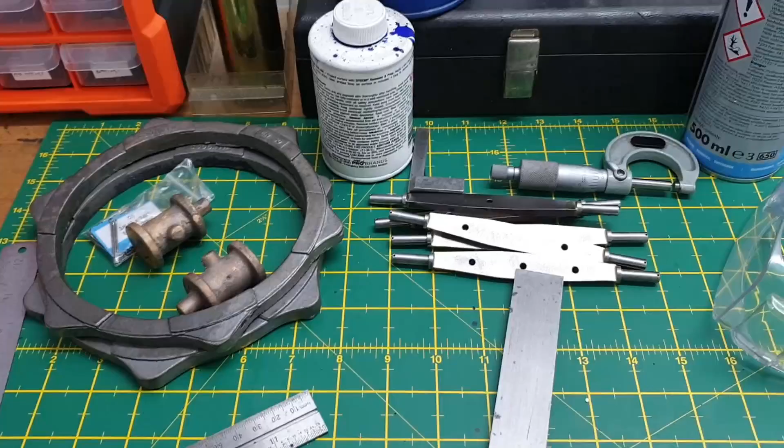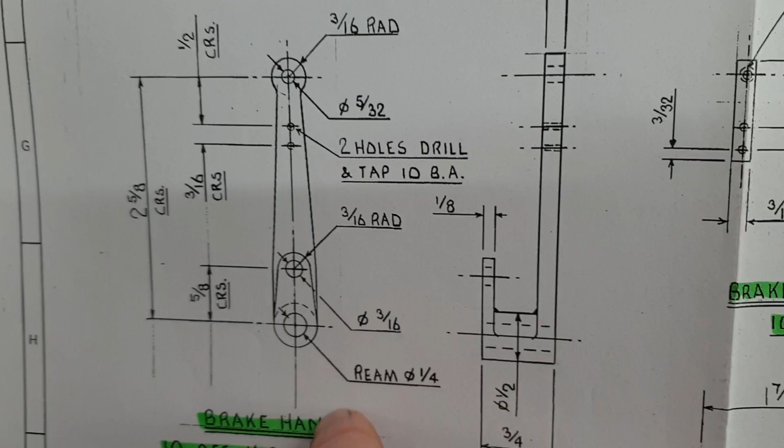Continuing with the brake system, we're now moving on to the brake hangers, which comprises a plate of 3/16 plate, an 1/8 plate, and a piece of 1/2 inch bar in between, which will be bored out and reamed 1/4 inch. So first things first is cut some steel up.

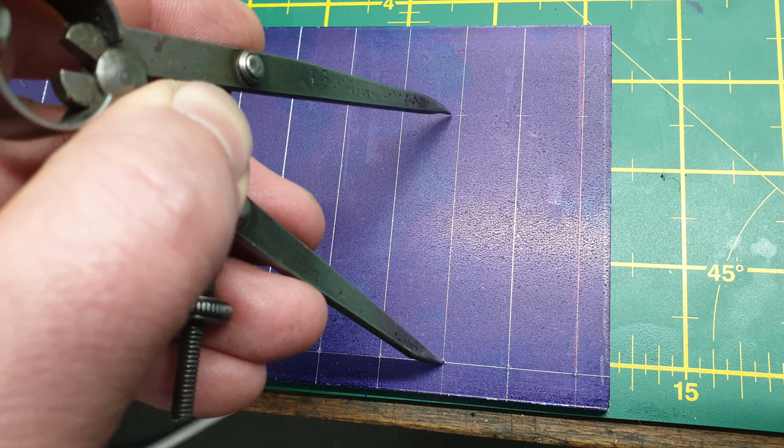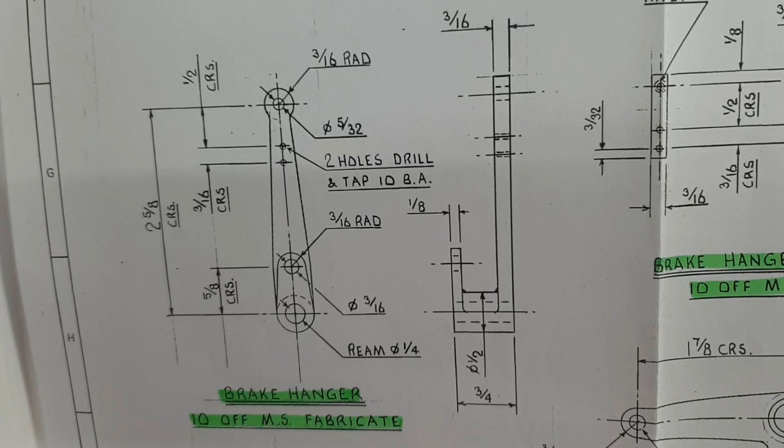Having thought about this, I think what we're going to do is, before we start cutting the plate into pieces, identify all these hole centres in the 3/16 plate, mark them off, centre punch them, drill them, tap these two 10BA holes while it's all one plate, to make it easier to handle and save messing around with bits and bobs later on. So that's what we'll do first.

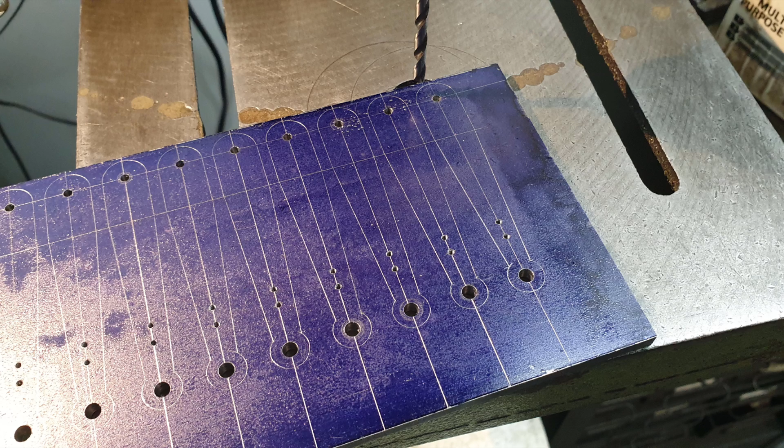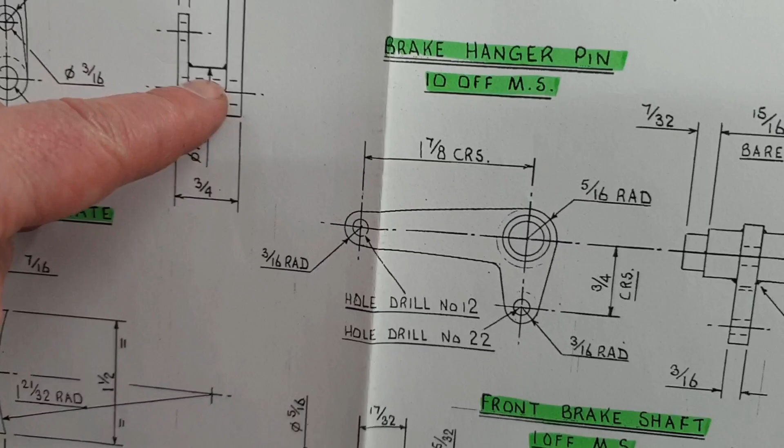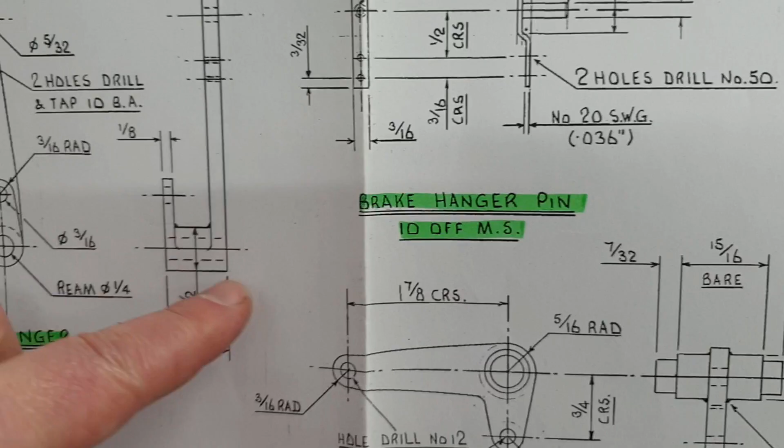Now then, I've gone on to drill this end at 5/32, same as that end. On the finished component, that hole will be a 1/4 diameter. But what I intend to do, as this is an assembly of 1/2 inch bar, a small piece of 1/8 plate, and the 3/16 plate we're just making now, is drill the bar and this end at 5/32. I can then put a piece of bar through there to hold it all in situ while it's silver soldered, and then we'll bore out to the 1/4 inch, which is the final bore. So that's the theory.

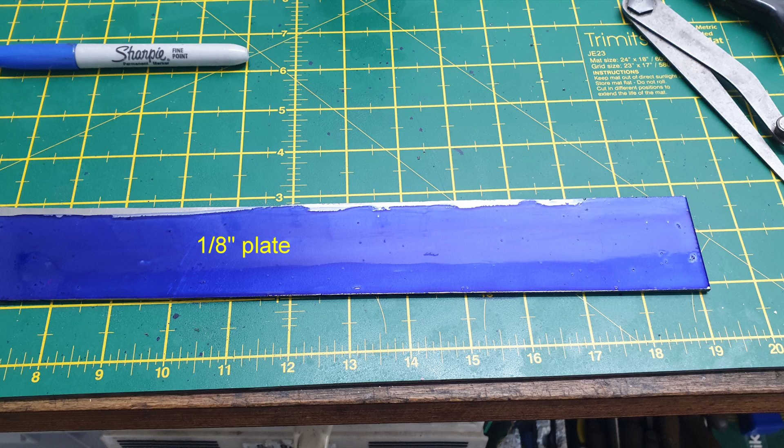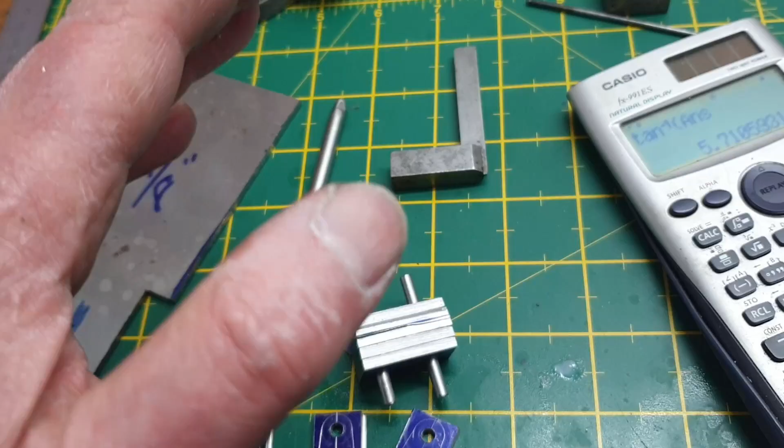Now then, I've cut out the small part of the brake hangers, and now we need to mill them to shape. Rather than do them individually, I thought I'll stick a piece of 3/16 rod through these holes and gang them up like so. We can rest them on the mill vise, with the rods resting on the tops of the vise jaws. If we cant the mill head over by about 5 3/4 degrees, or near enough 6 degrees, we should be able to just do a face cut right over the top of these blocks, and do 5 at a time in pretty quick order. So we'll give that a go.

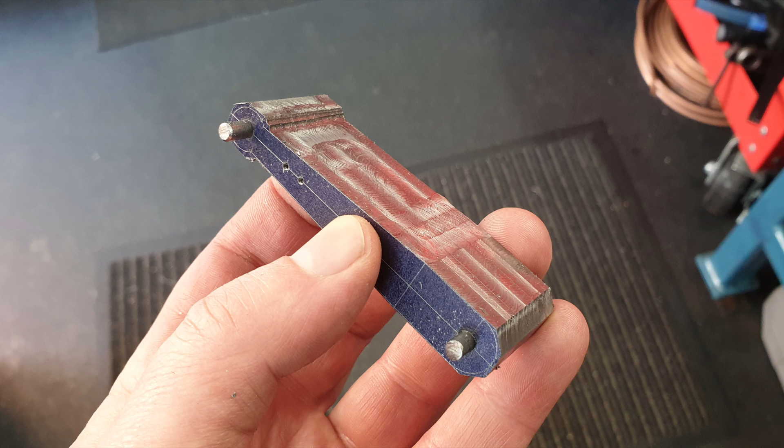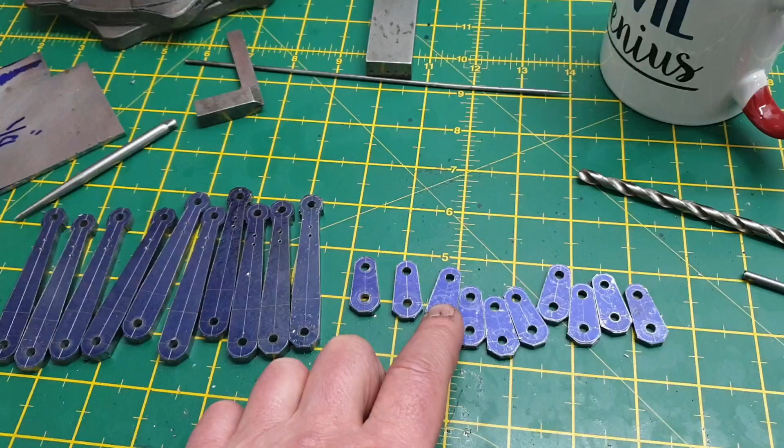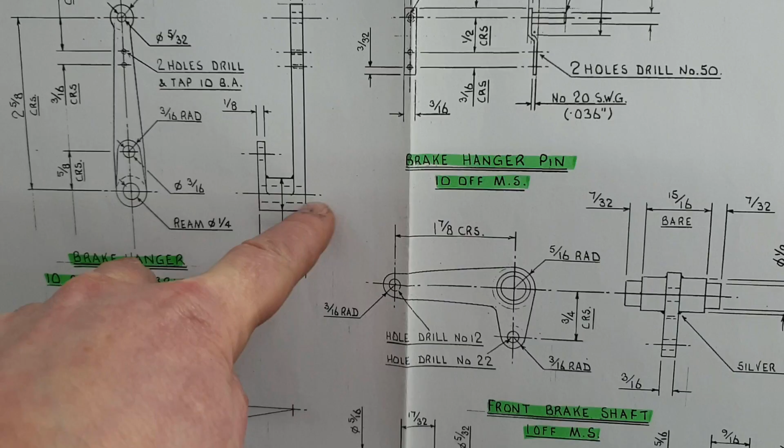Okay, we've got the 10 3/16 drop arms and the smaller 1/8 plate end of the drop arm, or brake hanger should I say. The next bit is to turn some pieces of 1/2 inch bar with a 3/16 hole through, so that we can pin the small piece, the bar and the larger piece together for silver soldering. Once they're silver soldered, we can drill through the quarter and ream a quarter, and that'll be those finished.

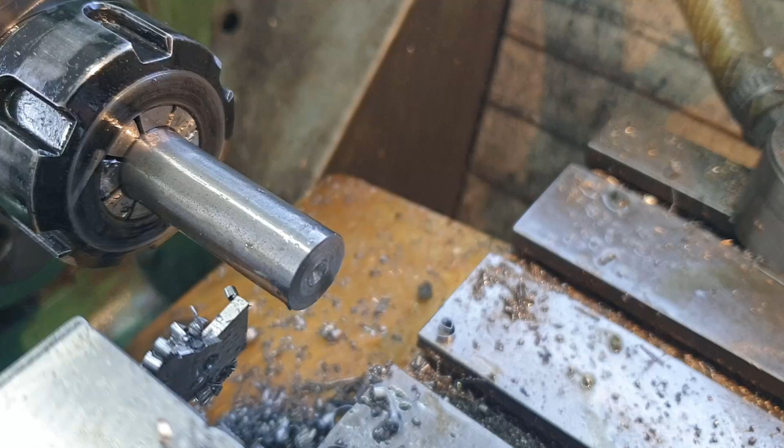Okay, now to make the spacers, what we've got is a piece of 1/2 inch mild steel bar in the lathe chuck, and we're going to drill it out to a depth of 1 1/8 inch thereabouts, and part off 2 spacers at a time. That's the plan. So we're going in first with a smaller drill, just as a pilot, and we'll be drilling to about 1 1/8 inch depth.

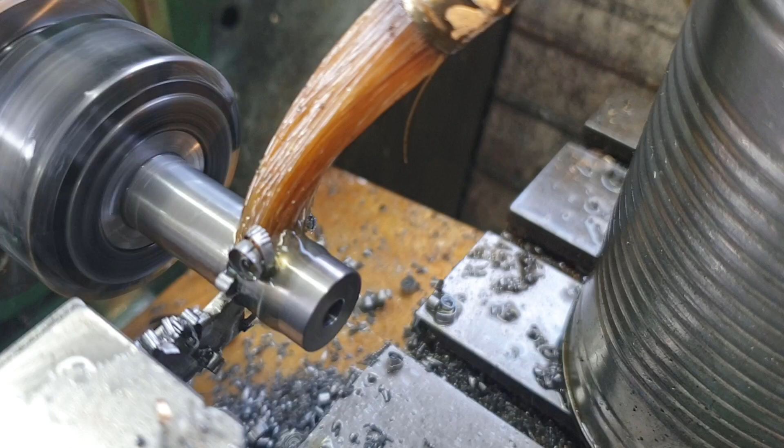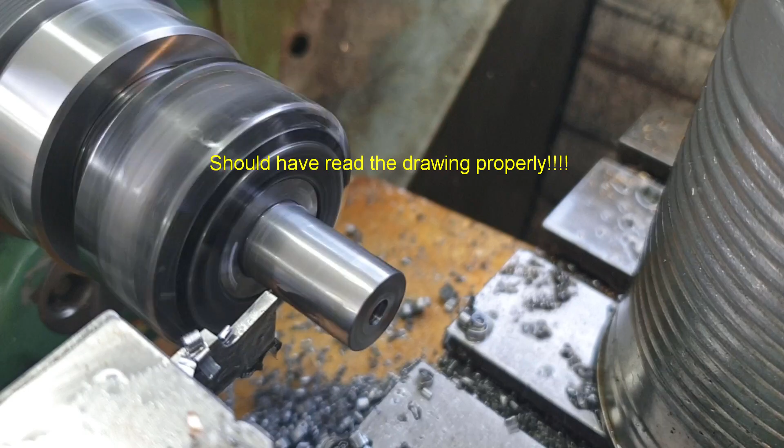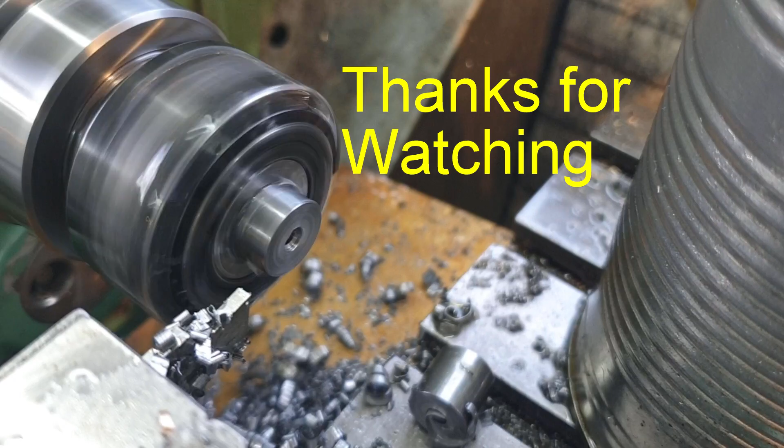Just go under the file to break the edges. There we go. Now for the second one. Yeah, that's two.